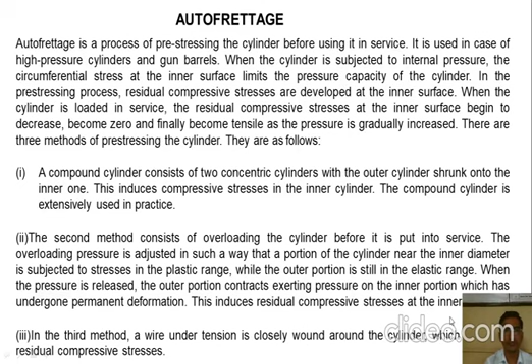The third is that wire under tension is closely wound around the cylinder, which results in residual compressive stresses. So these are the three methods used for autofrettage. Next, the first method: how the compound cylinder is used for pre-stressing in autofrettage. We can see it in the diagram also.

The inner diameter of the jacket is slightly smaller than the outer diameter of the cylinder. When the jacket is heated, it expands sufficiently to move over the cylinder. As the jacket cools, it tends to contract onto the inner cylinder, which induces residual compressive stresses. So there is a shrinkage pressure P between the cylinder and the jacket. The pressure P tends to contract the cylinder and expand the jacket. In the diagram you can clearly see the cylinder jacket provided, which is the first method of pre-stressing or autofrettage.

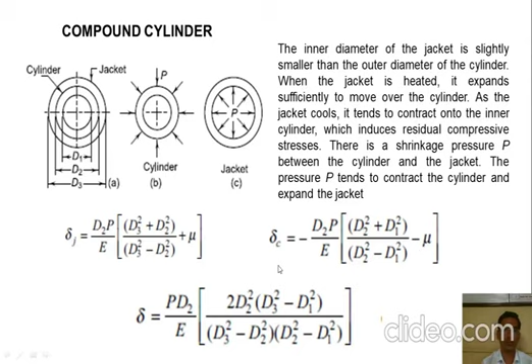Next point: gasket joints are provided to avoid leakage. A gasket is a device used to create and maintain a barrier against the transfer of fluid across the mating surfaces of a mechanical assembly. The main objective of the gasket is to avoid leakages. There are two types of gaskets generally used in the assembly: metallic gaskets and non-metallic gaskets. Gaskets made of metals are metallic gaskets, and gaskets made of non-metallic material are non-metallic gaskets.

Metallic gaskets consist of sheets of lead, copper or aluminum. Metallic gaskets are used for high temperature and high pressure applications. Non-metallic gaskets are made of asbestos, cork, rubber or plastic. These are applicable for medium or low pressure applications. You can see two types of diagrams shown here. This black component is considered the gasket. The second one is a non-metallic gasket, which is asbestos, cork, rubber or plastic. Here you can observe this black component is considered the gasket.

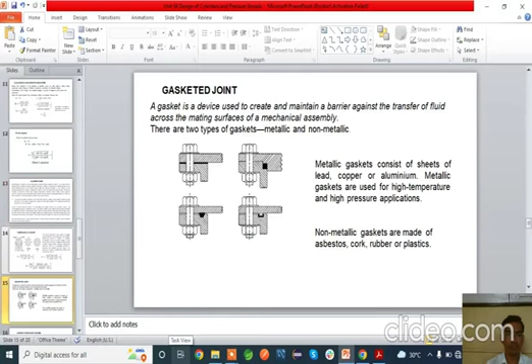Next is the unfired pressure vessel. An unfired pressure vessel is defined as a vessel or pipeline for carrying, storing or receiving steam, gases or liquid at pressure above atmospheric pressure. Such pressure vessels are designed according to national and international codes, IS 2825 1969, the code for unfired pressure vessels.

The Indian Standard code for pressure vessels gives the design procedure for welded pressure vessels made of ferrous material. In the diagram you can clearly observe a pressure vessel design. You can see the different sheets. By joining the different sheets by welding, the pressure vessel is made.

Then it is made up of a metal material, maybe cast steel or mild steel or alloy steel. Depending on the design pressure, the material may be the brittle or ductile material.

Then the type of welded joints used in the four categories: category A, B, C and category D. So here you can observe for joining at particular location, the various categories of the welded joints are used. So four categories are there: category A, category B, category C and category D.

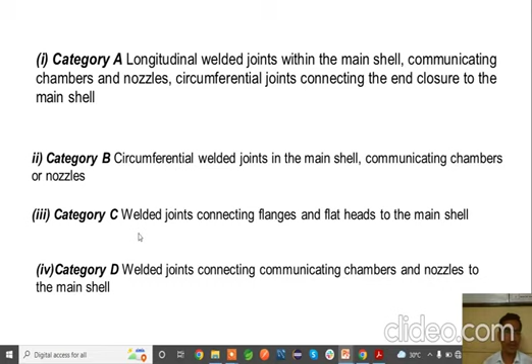Then second, category B is the circumferential welded joints in the main shell communicating the chamber or nozzles. Then third category is category C, welded joints connecting the flanges and flat heads to the main shell. Then category D is the welded joint connecting the communicating chambers and nozzle to the main shell. So here the same categories are used for the various regions or areas of the pressure vessel.

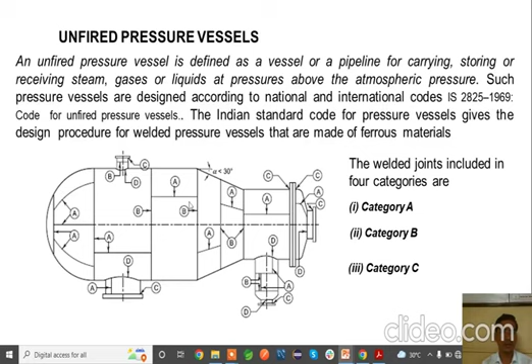Then types of welded joints and their efficiencies for the welding. So the first welded joint used is the double welded butt joint. The second one is a single welded butt joint with a backing strip. The third one is a single welded butt joint without backing strip.

Here in this diagram you can observe the backing strip is provided to strengthen the joint. Here, single welded butt joint without the backing strip. Means, depending on the loading application or pressure, the backing strip with the single welded butt joint is used.

Then weld joint efficiency considered for a double welded butt joint: if it is fully radiographed, 1; for spot radiograph, 0.85; and not radiographed, 0.70. For single welded butt joint with a backing strip it is 0.9, then for spot radiograph it is 0.80 and for not radiographed it is 0.65.

Then the third category is C, for single welded butt joint without backing strip. So fully radiographed weld joint efficiency is not there. Spot radiography is also not there, but 0.60 is considered as the efficiency for not radiographed conditions.

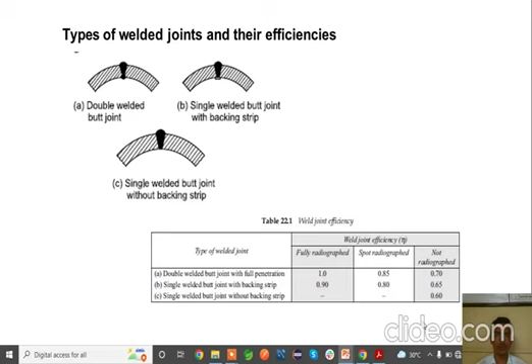Next, design of the end closures, that is the heads and ends for the pressure vessel. Different formed heads are used as an end closure for cylindrical pressure vessels. So the hemispherical head will be there. Then the semi-elliptical, elliptoidal or ellipsoidal head is also there. Then the third one is the dome shape head.

So for that head, the thickness is calculated as Pi Ri upon 2 times sigma t efficiency minus 0.2 Pi. Plus CA, meaning corrosion allowance: for each and every material, if some percentage of carbon is there in the material used, then we consider corrosion allowance.

Means if a brittle material like cast iron or cast steel is there, then we consider this corrosion allowance, and if mild steel, a low carbon steel material, is there, then we do not consider the corrosion allowance.

So here for this hemispherical head we are considering the thickness as Pi Ri upon 2 times sigma t, that is the tangential stress, times efficiency, minus 0.2 of internal pressure. Ri is the radius of the head, Di is the internal diameter, and Do is the external diameter.

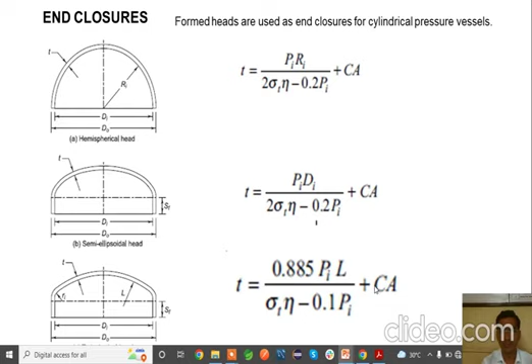Similarly, it is calculated for the semi-elliptical and dome shaped head. So here T equals this formula, plus corrosion allowance is considered, and for the third one T is equal to 0.885 Pi L. Also here length is considered, which is a very important parameter. The other parameters are the same, and plus corrosion allowance we get the design of the end closures.

Then openings in the pressure vessels. The openings are provided in the pressure vessels. These could be inlet and outlet pipe connections, manhole or handhole, and connections for pressure gauges, temperature gauges, and safety valves. The openings are circular, elliptical, or obround. Such openings are designed by the area compensation method.

So when the opening is cut in the pressure vessel, an area is removed from the shell, and it must be reinforced by an equal amount of area near the opening. The area removed should be equal to the area added. The area is added by providing the reinforcing pad in the form of an annular circular plate around the opening.

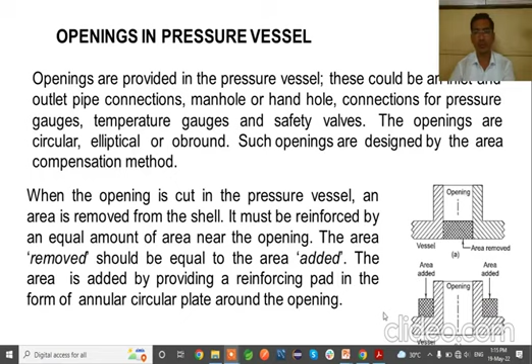So here in the diagram it is also shown: area removed and area added. So this is called openings and reinforcement when openings are provided in the pressure vessel.